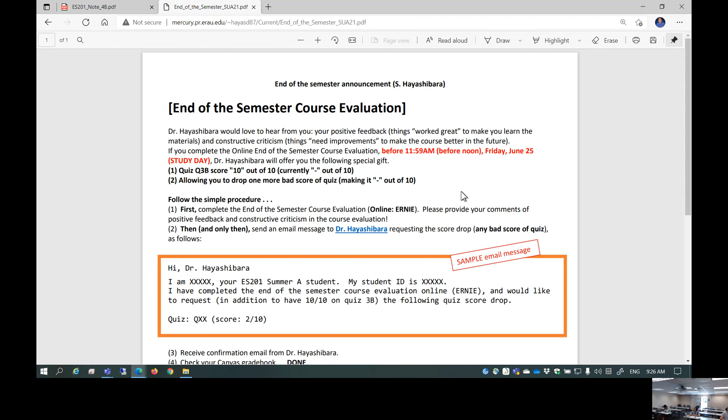If you complete the end of the semester course evaluation before noon, not afternoon, on Friday, number one, quiz 3B score becomes 10 out of 10. Currently, you probably have no score in it, okay? And also, you can ask me to drop one more bad quiz score. Suppose you have like a 2 out of 10, 0 out of 10, 4 out of 10 quiz scores, I can drop that. So please follow through this procedure here. Very simple procedure. And here is the end of the semester policy. Please read through it. This is very, very important.

And today is the last quiz, 3C. And Monday, June 28th, 8 a.m. until 10 a.m., final exam right here in this classroom. It's going to be a 2 hour exam. I'm thinking of 5 problems, but I don't know. I can possibly do up to 7 or 8-ish problems, but I think you probably prefer to have more time per problem. So I'm still probably thinking of going 5. How many problems did we do for the midterm? 4, isn't it? Yeah. 4 problems for 90 minutes. You had plenty of time, I hope.

No one, at least I noticed, wrote down a meaningless comment like, oh, I'm running out of time. Every time a student writes run out of time kind of thing, I just simply ignore it. Because, yeah, too bad. But if I see more and more of that kind of comment, that means the required solution time versus given time is getting closer. So 4 problems in 90 minutes was probably more than plenty. Okay, so 2 hours, 5 problems, I guess. I don't expect any complaint about running out of time.

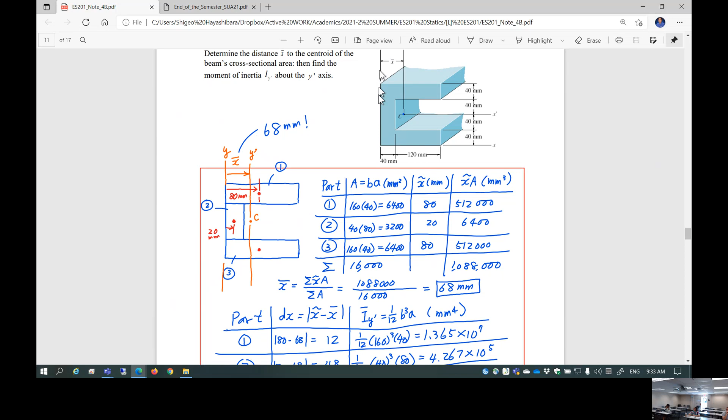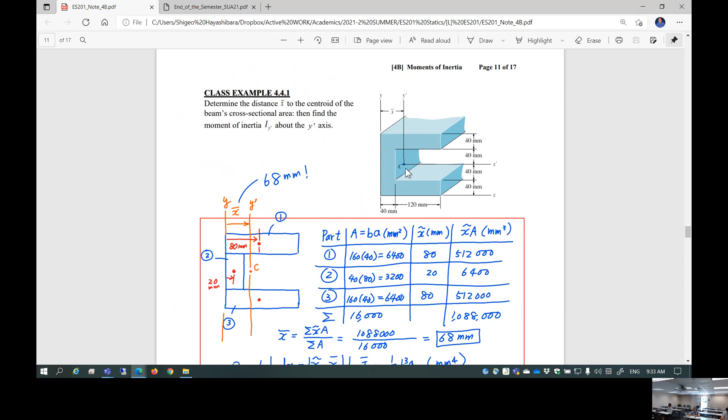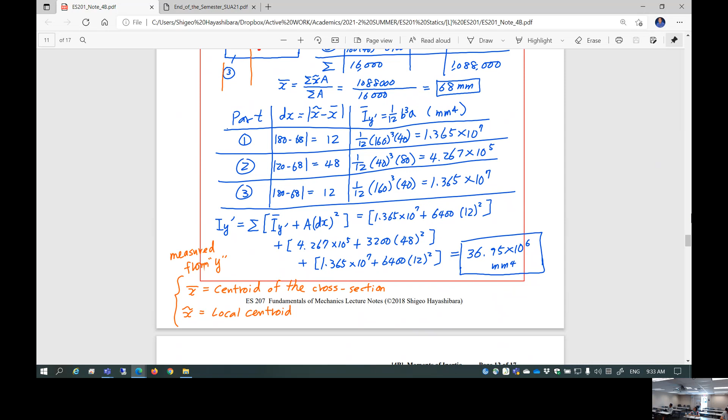Then after that, you're going to find the moment of inertia I y prime, which is the moment of inertia about the y prime axis for this complete cross section, which happens to be a centroidal axis. Okay. Then of course you're going to create another table applying the parallel axis theorem. Yeah. So this is the parallel axis theorem for each part. Determine moment of inertia. Okay.

This is very specifically the method I choose every time when I give you composite body problems such as, okay, determine the centroid location, determine moment of inertia, stuff like that. I'm going to force you to fill in the blanks of the table. I'm going to probably preset the table for you, and then, okay, fill in the blanks here, and then determine the moment of inertia of this cross section given. Okay, so you have to stick with the method I cover in class.

This could be very unique for any statics class. Perhaps other professors may not use this kind of table. This is something I started when I was an undergrad student. Keep doing it. This is the only way I can understand moment of inertia. Too bad you're taking this class from me. But this is a method.

So a table is very specifically set up for each different part; this is the area. Area is always specifically b times a. Base times height, always. The reason is if you deal with a rectangular cross section, it's always 1/12 b cubed a or b a cubed, either way. B a, that comes in. So I always stick with b times a for the cross section area. This is x tilde. This is a local centroid for each part.

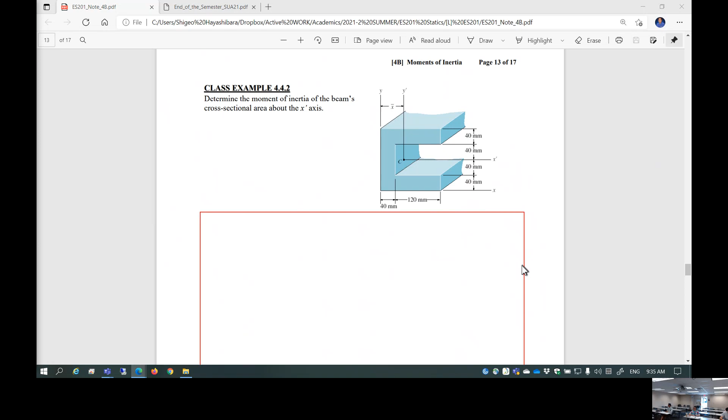Determine the moment of inertia of the beam's cross-sectional area about the x prime axis. Wait a minute. Ooh. What's this? Deja vu? I thought I did it. Wait a minute. What's going on? This one is about the x prime axis, not the y prime axis. So what's the difference between this one and the previous solution? Can you use most of the information we developed in the previous problem, right? I guess.

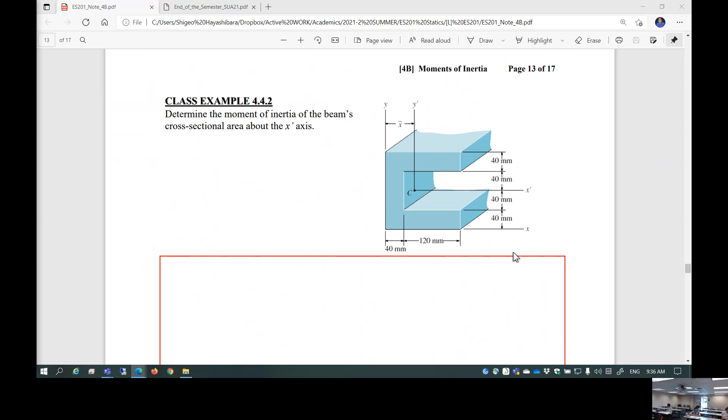So here we go back to this page, page 11. So essentially, we are going to use the same exact information about parts 1, 2 and 3 and the area of each part. Now, you don't need x. Now, in this case, y tilde and y tilde A need to be computed, right? Right. Now, what is the big difference here? What is y tilde?

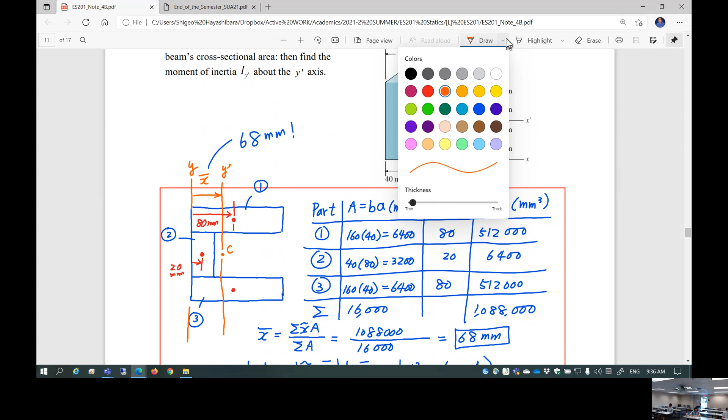So one thing you realize is, wait a minute, this x prime itself is the centroidal axis. We know that. We don't need to find this kind of stuff. We know this, right? This is already given. Y bar is 80. So x prime is already the centroidal axis, okay? So we probably don't need any of those, but we can still use the information of area, okay?

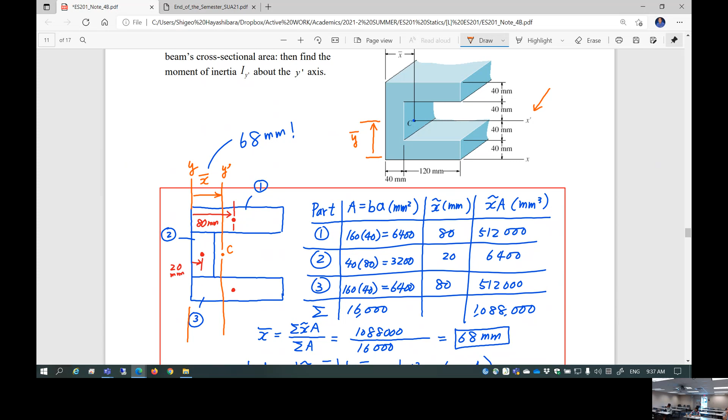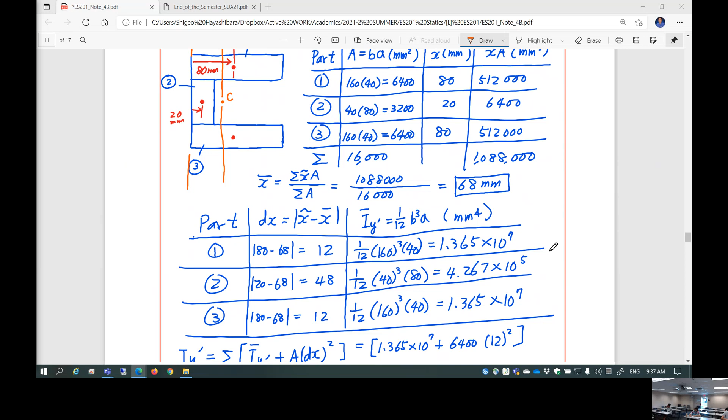So let's just go ahead and do the same thing. I'm going to use the information of the area of each part, and then construct the moment of inertia computation table for the value of Ix prime. That's the only thing I do. So let's go down here and construct the table once again. Just zoom in a little bit. It's the exact same parts, 1, 2, 3.

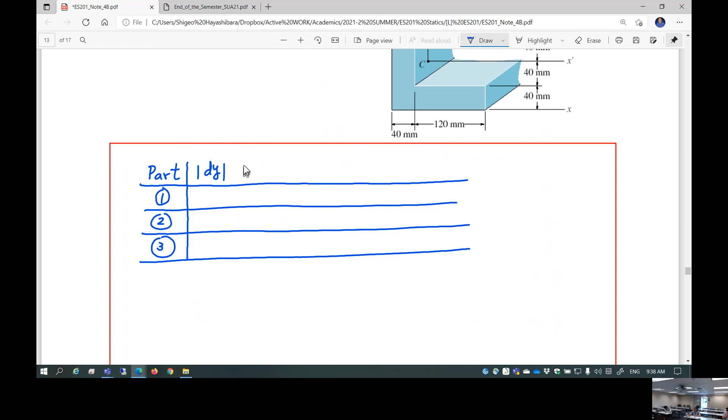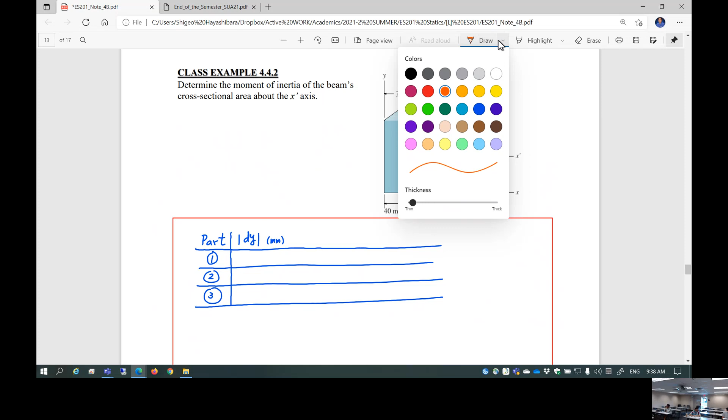And what you need here is the magnitude of dy. Plus or minus doesn't matter because we're going to take the square anyway. This is in millimeters. So by looking at this figure, once again I'm going to cut out the same exact parts. This is part 1, this is part 2, here is part 3. And each part has its own local centroid, right here, right here, right here. The question being asked is dy, that means measured from the centroid.

What is this for part 1? Obviously the centroid of part 2 is right here on the x prime axis, so I know that. How about this and that? One is positive, one is negative, but it's the same value, right? What's the magnitude here? What is dy? 60. That's right, so both 60. One is plus, one is minus, but I don't care because we're going to take a square anyway, so I'll just take the magnitude. Good.

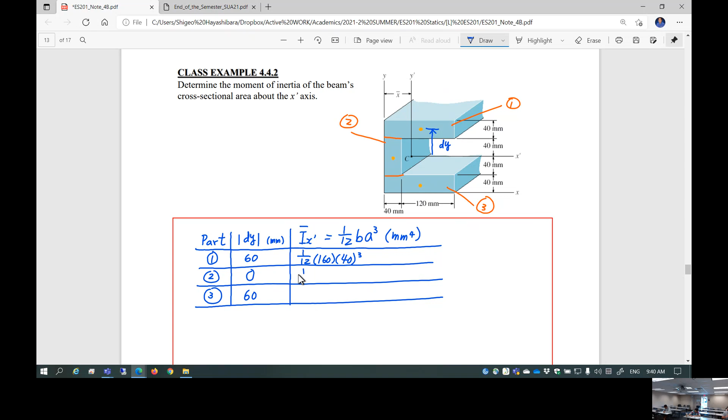And then for each part, I'm going to find Ix prime bar, the local moment of inertia of each part, which is 1/12 B times A cubed for a rectangular cross-section. You can pick up the information from the previous table: 1/12 times base 160 millimeters times height 40 cubed. The unit is millimeters to the fourth. This is 1/12 times 40 times 80 cubed. This is 1/12 times 160 times 40 cubed.

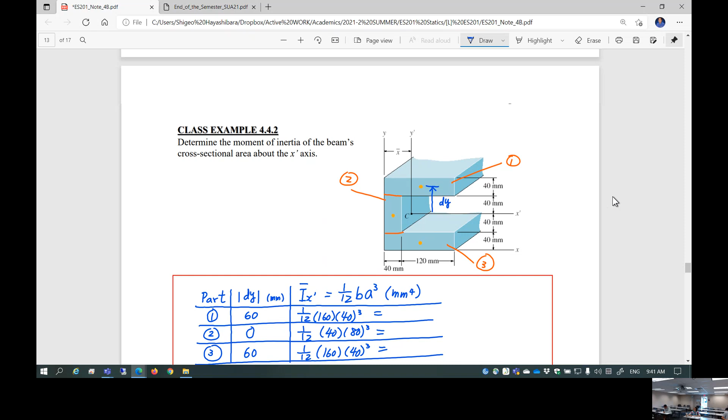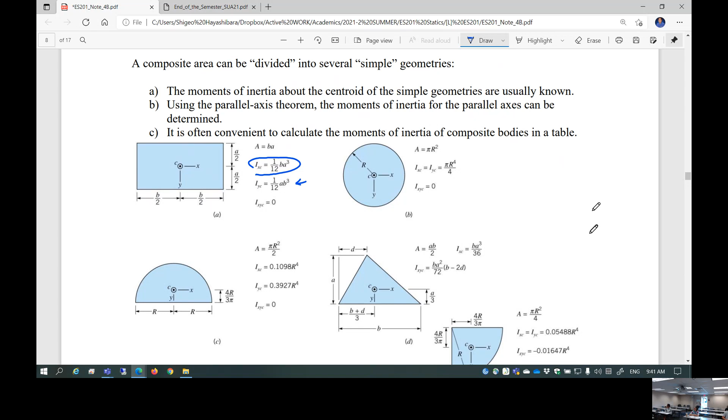Keep in mind this is flip-flopped, because in the previous problem we did Iy prime, which is 1/12 B cubed A. This is Ix prime, so this is 1/12 B A cubed. Slightly different, but both rectangular cross-sections. Where does that equation come from? Let's review. It comes from here. I'm using this now; the previous problem used this one. This is the moment of inertia of a rectangular cross-section of base B, height A, about the centroid. That's the local moment of inertia of each part.

If you compute that, this is 8.533 times 10 to the 5 millimeters to the fourth. This is 1.707 times 10 to the 6. This is the same, 8.533 times 10 to the 5. Now we are ready for the parallel axis theorem. Part 1 is offset by dy from the x prime axis, so you have to use the parallel axis theorem. This one too, same and opposite dy. This one is right on the x prime axis, so you don't need to apply the parallel axis theorem for this part.

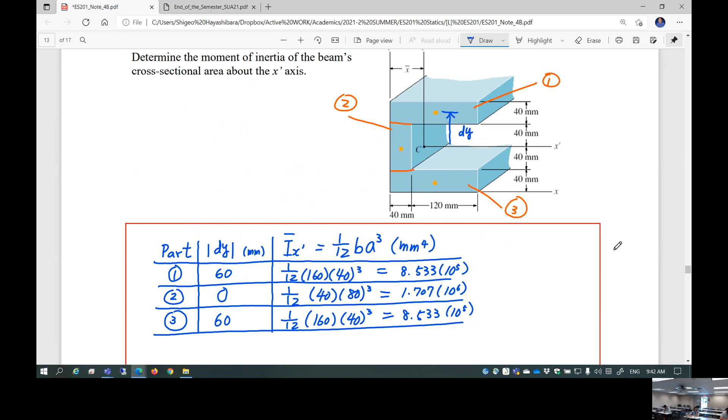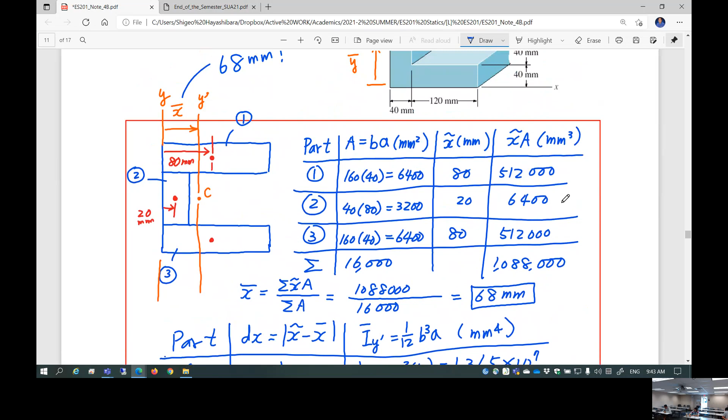So what is the composite body's Ix prime? It's the summation of Ix prime bar plus A times dy squared. So this is 8.533 times 10 to the 5 plus area A of part 1. I have to sneak a look here: area of part 1 is 6,400 millimeters squared, area of part 2 is 3,200 millimeters squared. So area 6,400, dy is 60 squared. That's part 1. Part 2 is 1.707 times 10 to the 6 plus 3,200 times 0 squared, so that whole term is 0.

Part 3, same as part 1, 8.533 times 10 to the 5 plus 6,400 times 60 squared. If you go through this computation, you get Ix prime equals 49.493 times 10 to the 6, millimeters to the fourth power. This is the moment of inertia of the entire cross-section of this composite body about the centroidal axis x prime. Okay.

So it's essentially the same procedure, just a different direction. Okay. So if you take a look at this homework assignment here, wait a minute. Is this déjà vu? Homework 441 is locate the centroid y bar and then Ix prime. That's what you need to be doing in homework 441, and now homework 442, it's just a different axis. So it's kind of a similar yet different problem, and the same process.

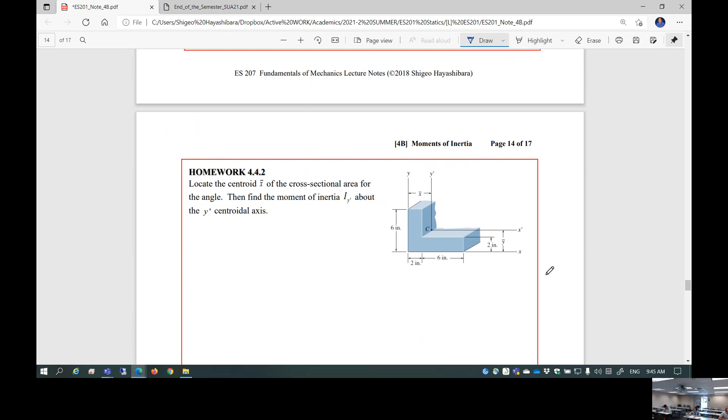Okay, same process. Now, before we move on, I have an interesting trick. I usually do not share this because, unless you really understand what you're doing, this could be a disastrous mistake. So we have to approach very carefully. There is an easier way to determine moment of inertia for this cross-section, only for Ix prime. Now, this is a unique cross-section. What's so unique about it?

This is different from your homework assignment. This is your homework assignment. This is a class example. Class example, this is a very unique cross section. What's so unique? Symmetric.

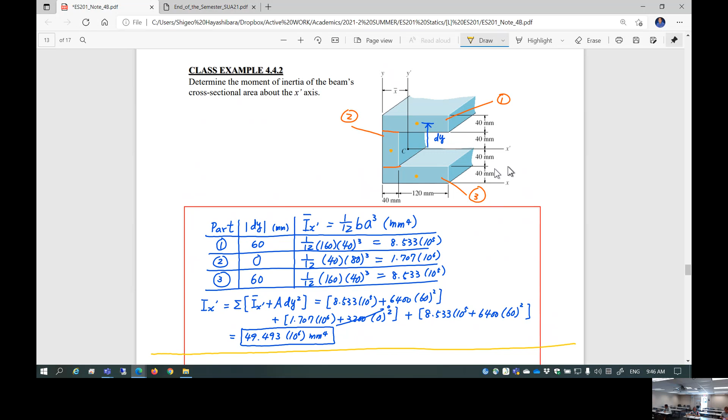It's one of those. It's a wasp. Wasp, yeah. Wasp is incoming. Is it just circling? Yeah, it's circling. It's patrolling something. Yeah. You just get a good hit on it. Okay, good. Oh my god, I hate... It's gone. Yeah. Sorry.

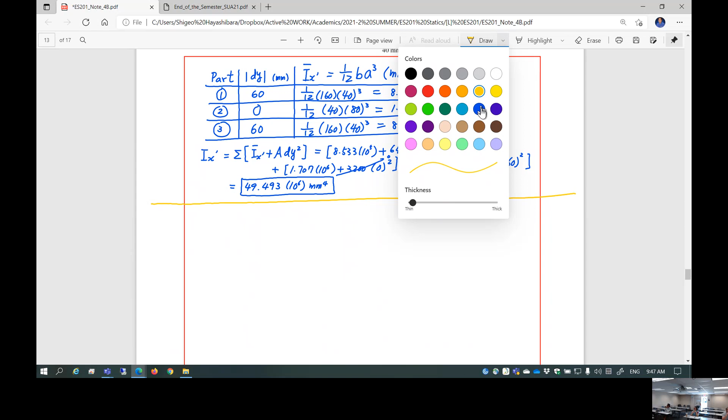So this is actually symmetric about the x prime axis. If you have a cross section which has at least one axis of symmetry, you can actually bypass all of those things. Let me show you the bypass, easier solution here. I actually wouldn't recommend it, because people think, hey, I can do this for any situation, but it's not. So this is the situation where you have a cross section given something like this.

Okay, so this is a cross section, which is completely symmetric about the x prime axis. This is the centroid. This is the centroidal axis. So you can represent this as essentially equal to this solid rectangular cross section, and you subtract another rectangular solid thing.

Okay, so you can represent the moment of inertia Ix prime of this thing, which is, wait a minute, yeah, this is actually, sorry, 160 millimeters. It doesn't look like 160, but this is also 160, 160 millimeters both. Subtract this thing, which is 120. This is what, 80, isn't it? 80.

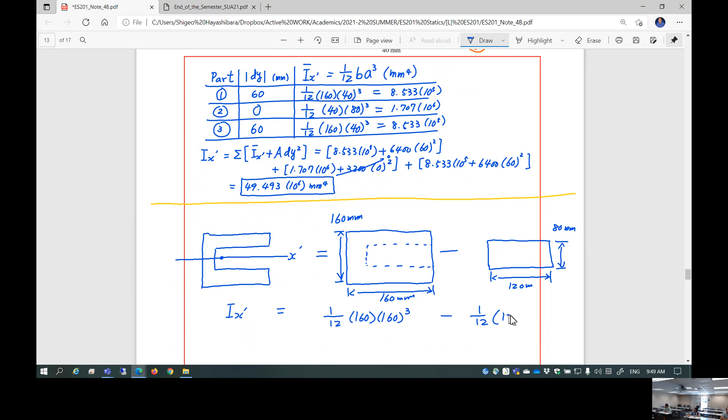So this is about the centroidal axis x prime. This is given by 1/12 b h cubed. This is 160 times 160 cubed, subtract 1/12 times 120 times 80 cubed. This is actually a much simpler computation. You can get the same value, 49.493 times 10 to the 6 millimeters to the fourth power.

So this is actually a much easier way to find the moment of inertia of this cross section, because this cross section is kind of unique. You can subtract the internal guts out, just subtract the moment of inertia of that portion of the area. Okay, I don't recommend it. But oftentimes, if I know I can do this, I'll do this because it's much easier.

Now, obviously, you can never do this if you have an axis which is not lined up as a centroidal axis. So you can never do the same thing for Iy prime, period. Don't do the same thing for Iy prime. This is only Ix. You cannot apply this for Iy prime. So that's why I don't recommend this, because people do that all the time. Oh, this is symmetric, let's just subtract. Well, wait a minute, it's the wrong direction of moment of inertia. You can't do that. Go ahead.

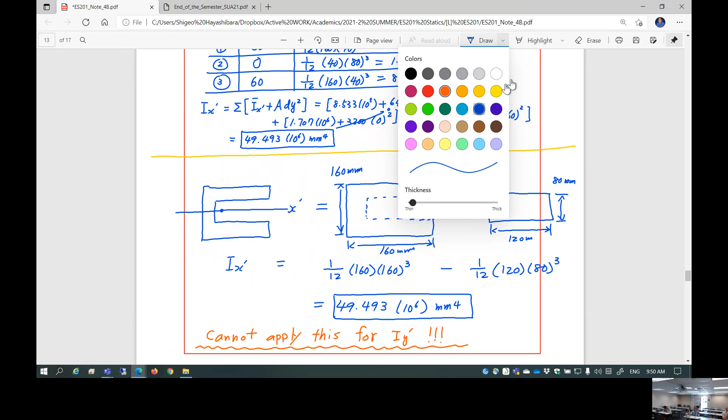So, say the centroid was aligned with the y prime axis and there was some symmetry around that. Would that be the only case we'd use Iy instead of doing Ix? The case you can do Iy also is, suppose you have a cross section completely symmetric in x and y. If you're given this kind of cross section, you can do Ix and Iy both by subtraction. But this case is only in the x direction, because in the y direction it's not symmetric. That's right. So you can do that if so. Okay. All right, next page.

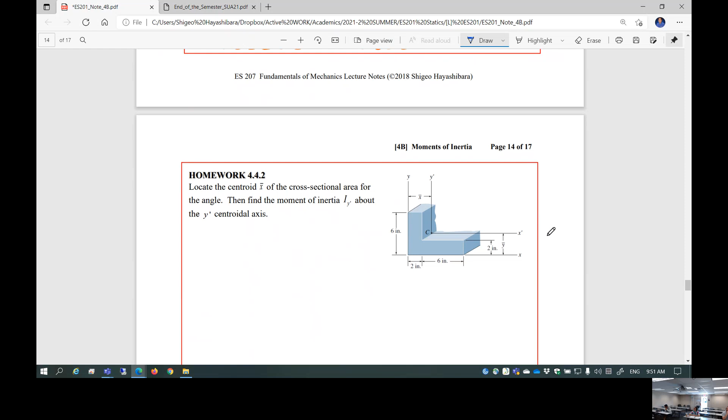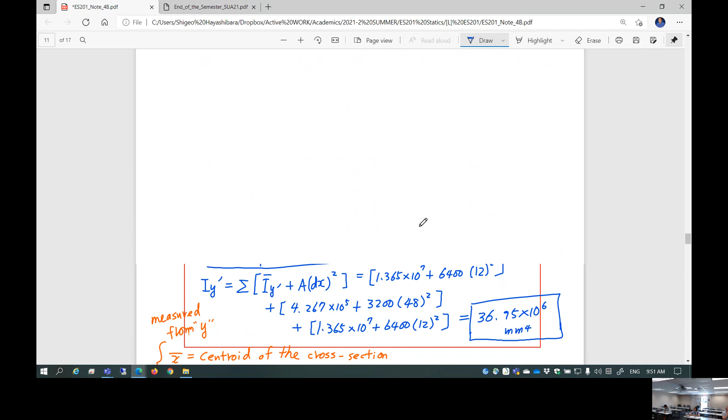So this is a homework, of course. Too bad, this is not symmetric in any way. So you have to do the table method, create your own table, the standard table which we just did in class. This is the table to compute moment of inertia using the parallel axis theorem, and this is the table you need to determine, if necessary, the centroid location. So you typically need two tables: one to determine the location of the centroid, the other to determine moment of inertia using the parallel axis theorem.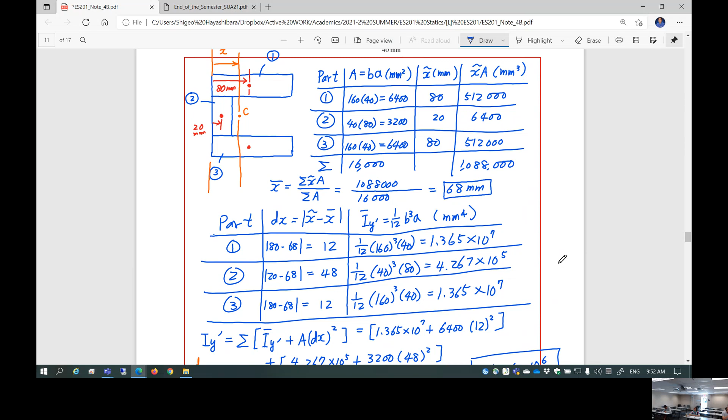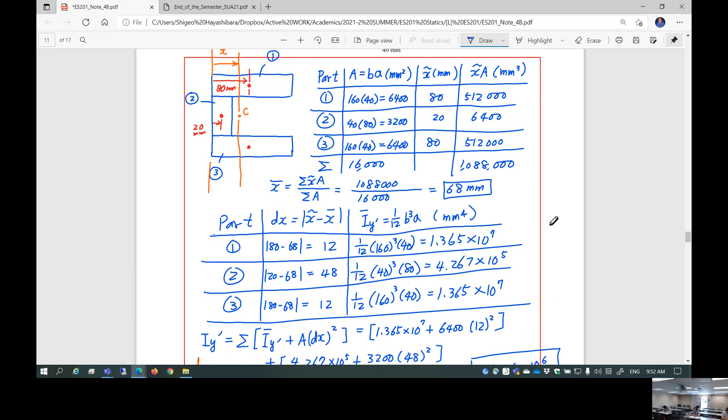This is rock solid standard, so please expect this kind of table question. Fill in those. Okay? So it's important to do your homework exactly as it's shown. Exactly like this. Please do that. Okay. So next page, let's take a look at the product of inertia, Ixy.

Okay. Do you remember the definition of Ixy? Ixy is the integral over the area of dIxy dA. So this is the product of inertia. Obviously, the product of inertia of the area is going to be zero if the area has at least one axis of symmetry. In this case, this area has no such thing, so the product of inertia is non-zero.

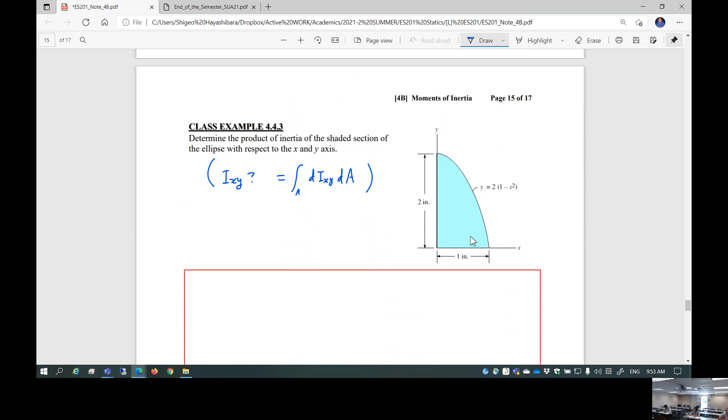So let's find the product of inertia, very similar to what we did to find the moment of inertia. You have two options. One is to choose the arbitrary distance x, cut out a very thin strip dx, and then integrate x from 0 to 1 inch. That's the integration in the x direction. Or you can choose distance y, cut out a thin strip dy, and integrate from 0 to 2 inches in the y direction, either way. I'm going to choose this method.

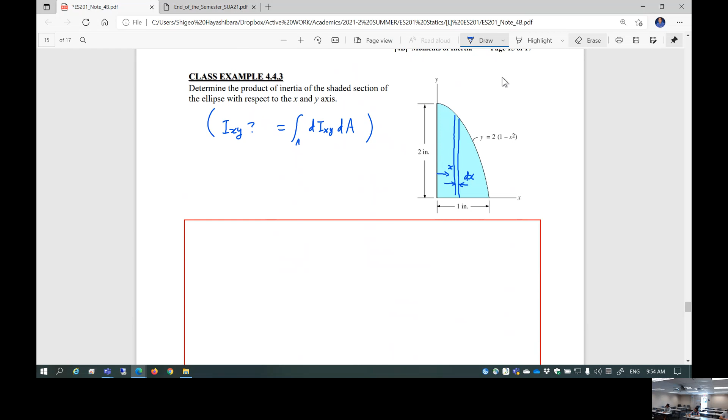So let me sketch it out. This is x and this is y. I'm going to take the distance x and a very thin strip, which is dx. So this is the area dA. This area dA has a local centroid C, at x tilde, y tilde. So this is the local centroid.

And this is the function given: y equals 2 times (1 minus x squared). So this is y as a function of x. The local centroid y tilde is equal to half of y, and the local centroid x tilde is essentially equal to x. And dA is approximated by a rectangular strip, so dA is equal to y, which is this height, times the width dx. So dA is y dx.

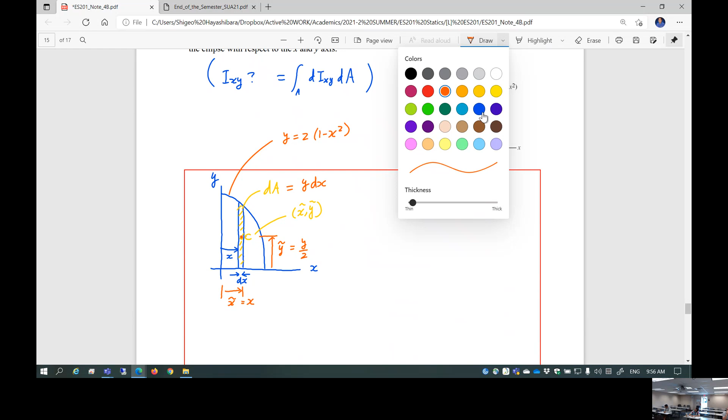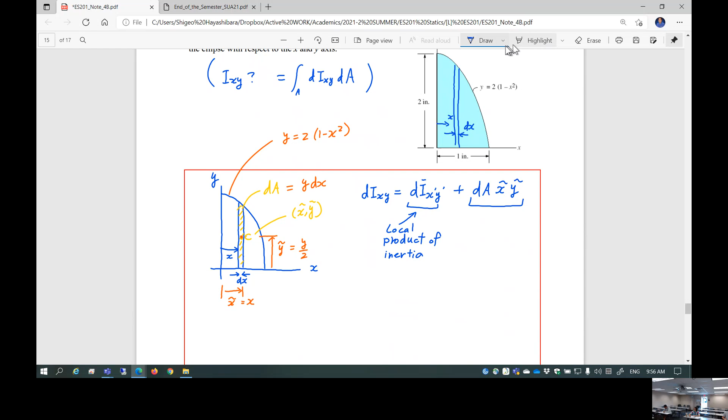So now I'm ready to integrate to find the product of inertia. dIxy is dIx'y', which is the local product of inertia, plus dA times x tilde y tilde. This is the parallel axis theorem, as you see. Those two added together give dIxy, the product of inertia of the small strip dA. So let's figure out what it is.

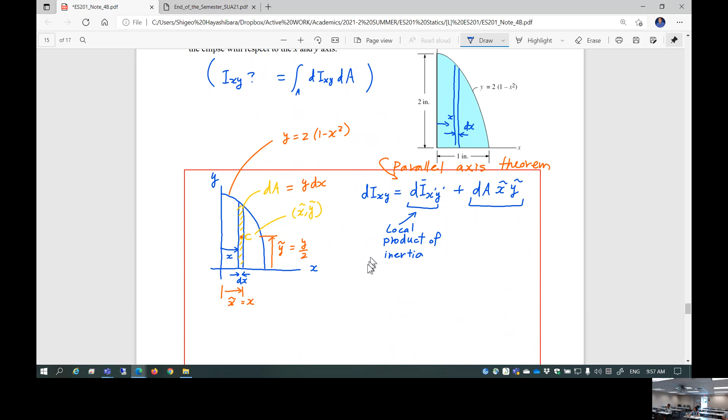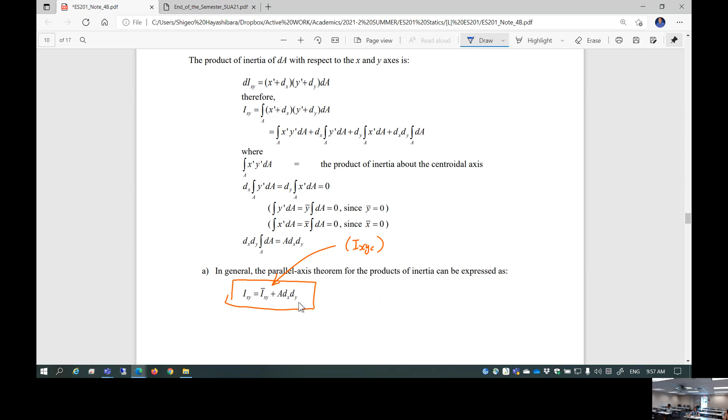Can you explain how you got to this equation again? This equation comes from here. This is the parallel axis theorem for the product of inertia. The product of inertia involves x and y. For moment of inertia it's like A dx squared or A dy squared depending on x and y, but for the product of inertia it's A times dx dy, because the product of inertia involves both x and y. So this is the parallel axis theorem for the product of inertia.

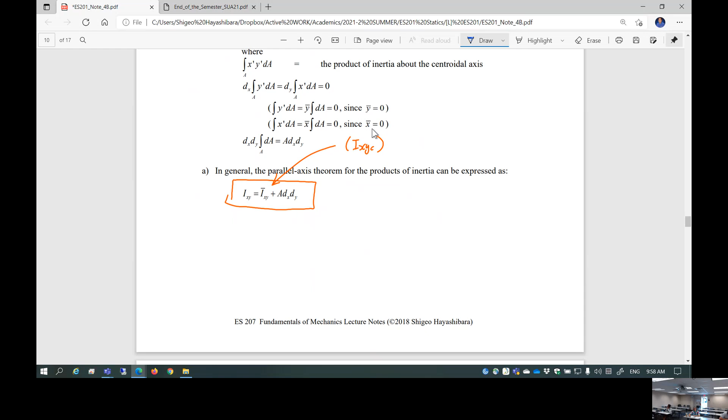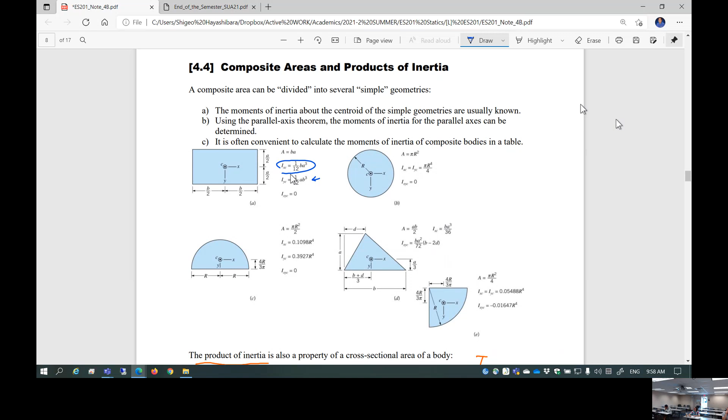And this Ixy at C is the local product of inertia of the rectangular strip. Like I said, the product of inertia becomes 0 if you have at least one axis of symmetry. If you look at the previous page, for a rectangular cross section the product of inertia is 0. So it's quite important here. What's the product of inertia of this rectangular strip? 0. Important. Yeah, it's 0.

So let's figure out what it is. dIxy is equal to 0 plus dA, which is y dx, times x tilde, which is x, times y tilde, which is half of y. So this is 1/2 y squared x dx. Now y is a function of x, so let's plug in y equals 2 times (1 minus x squared): 1/2 times [2(1 minus x squared)] squared times x dx. If you further simplify, this is 2(x plus x to the 5th power minus 2x cubed) dx.

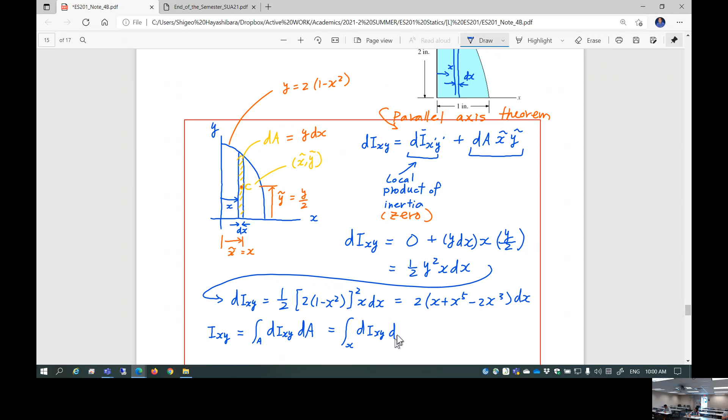Now I want Ixy. Let's integrate over the area A of dIxy, which in this case is an integral in the direction of x. This is all a simple function of x, so you can integrate in the direction of x, from x equals 0 to 1 inch, of 2(x plus x to the 5th power minus 2x cubed) dx.

It looks like you can finish up this integral. This is 2 times x squared over 2 plus x to the 6th over 6 minus x to the 4th over 2, evaluated from 0 to 1 inch, which is equal to 0.333 inch to the 4th power. This is the cross product of inertia of this cross section.

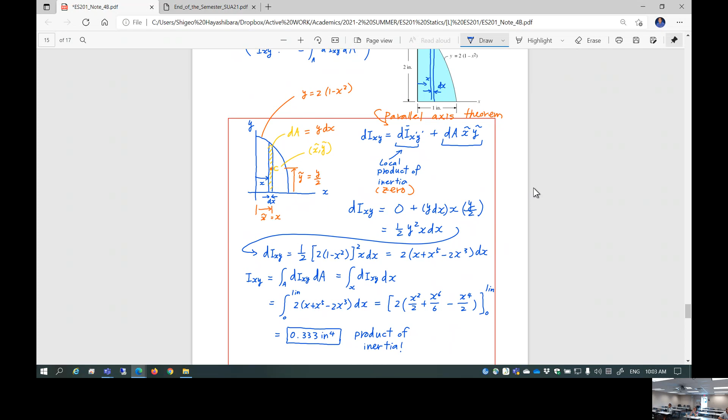Typically this is rare, because who's going to create a door like this? Not many people. Doors are usually rectangular.

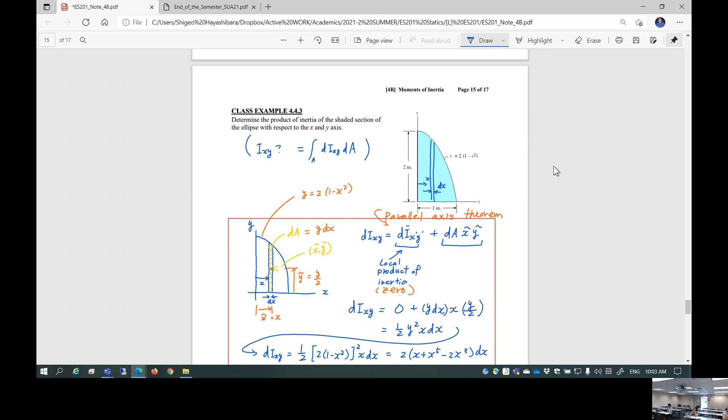Maybe if you want to minimize drag on a camping trailer, you'd use a teardrop shape, and the door would be teardrop shaped too. What is the product of inertia of this cross section? You can pick up your calculator and compute it. Anyway, it's rare, of course.

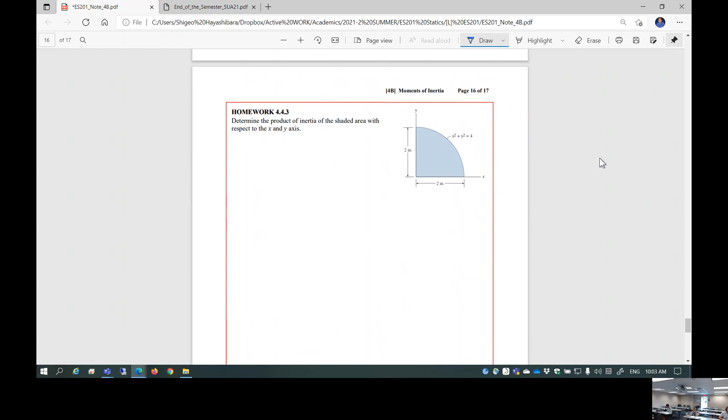So the next page is homework 443. Determine the product of inertia of the shaded area with respect to the x and y axis. Obviously you can do this two ways, integrating in the x direction or y direction, taking a small tiny strip, either dx or dy. It's a very similar process. Please do it by yourself.

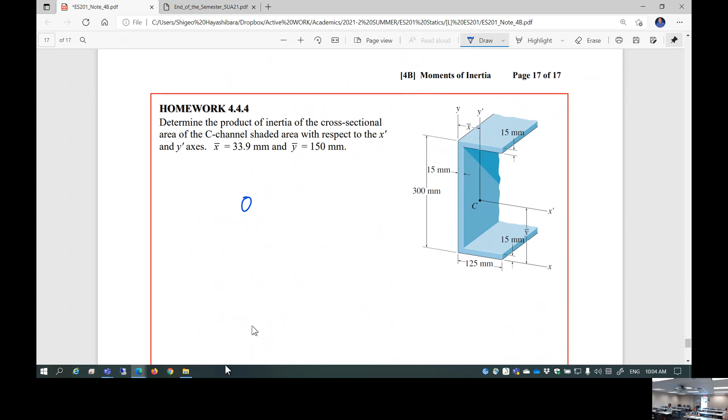So when I look at your homework solution, I already know the answer is 0. But that is not the solution, because I told you today I want to see your solution process to get this result. Let me take a look at the solution idea. I know the answer is 0, but that's just the answer, not the solution. I want to know the solution.

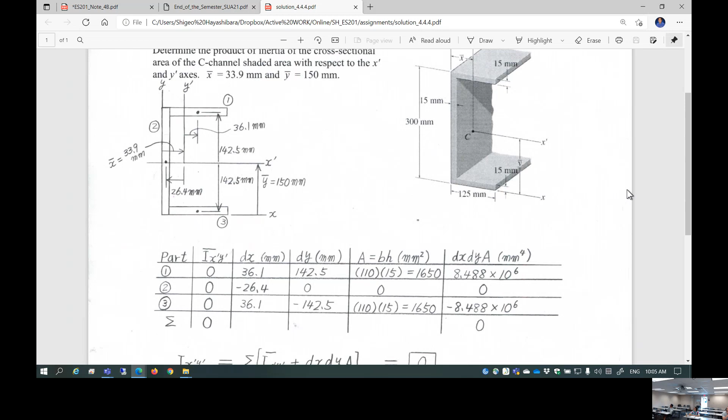So let's take a look at 444. This is the solution. As usual, you cut this composite into three parts: part 1, part 2, and part 3. You create the same kind of table we've been using for moment of inertia, and find the local product of inertia for each. Since these are all rectangles, the local cross product of inertia is all 0.

But you have to find dx and dy because you want to apply the parallel axis theorem. Then you do the same thing: summation of all local products of inertia plus the parallel axis terms based on dx, dy, and cross-sectional area A. It should be 0, and that's why this is 0.

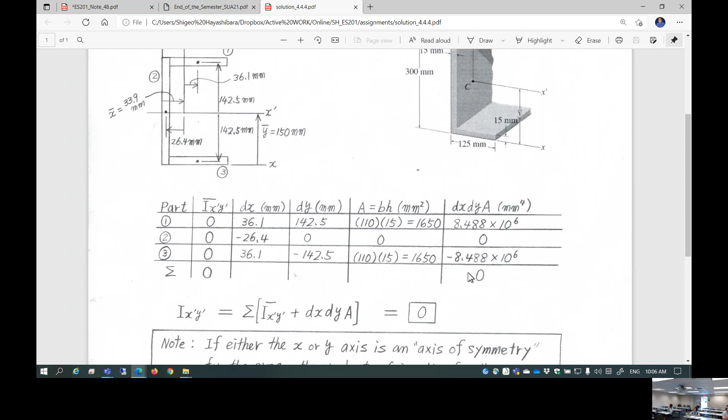By the way, I kind of knew it beforehand, because if either the x or y axis is an axis of symmetry for the area, the product of inertia for the area is 0. We know that, but you have to draw the conclusion by doing the computation. This is what I expect.

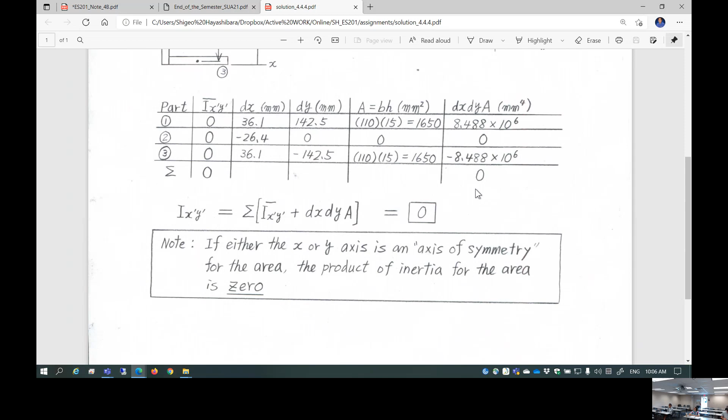So please do not be lazy at the very end. Of course, some of you will say the homework answer is just 0, we know that, that's it. No, you have to prove it. Too bad, this is engineering.

I'm a Japanese Toyota engineer, sorry about that—used to be. I'm American now, kind of getting sort of changed into this country's culture, or whatever kind of culture. But anyway, I used to be Japanese. I cannot be American, too bad. I'm a US citizen, but I'm Japanese. It's so convenient—every time people say something, oh I'm Japanese, I don't know what you're talking about, and if people say oh I thought you were Japanese, oh no I'm a US citizen. So either way, very convenient identity crisis.

Any question here? So this is it, I covered everything. Congratulations, probably a little too high level, because you have to take the quiz and the final exam is coming up Monday. Do you have any question?